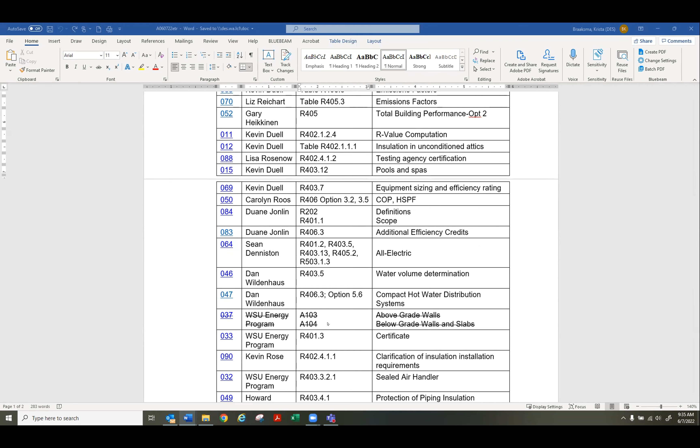Okay. We will now look at the agenda that you see in front of you. And is there anybody who wants to either modify something or make a motion to approve it as written? Just so you know, all the remaining proposals are on the agenda today. I do not expect we will get to every single one of them, but we will get through many of them. And I did inadvertently add a proposal that was dismissed because it was incomplete, and I apologize. I've got it stricken here. So we will not be hearing that one.

Motion to approve. Second that motion. This is Greg. Thanks, Duane and Greg. We have a motion. We have a second. Is there further discussion on the agenda? Okay, all in favor, say aye. Aye. Aye. Aye. Any opposed, say nay. Okay, we now have an agenda. We have minutes from May 27th.

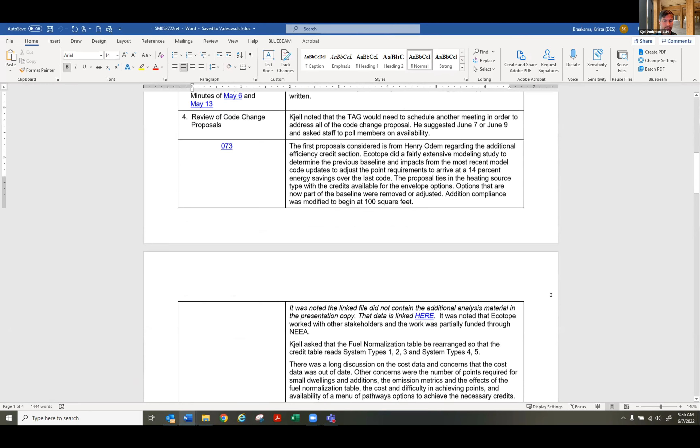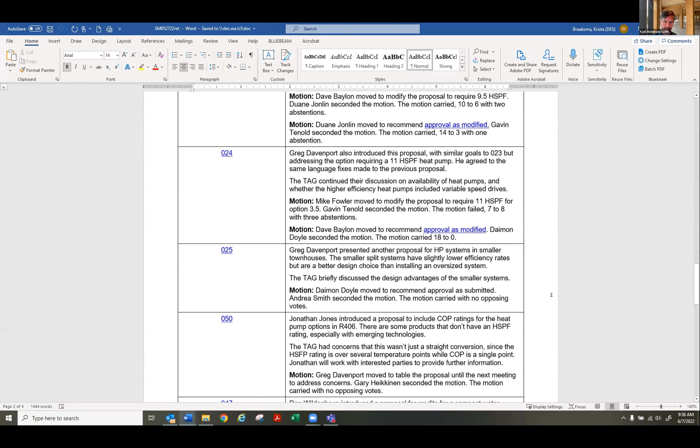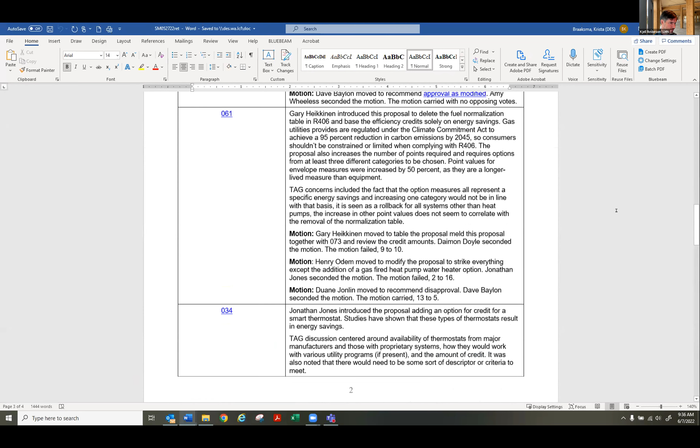This is Amy. I move to approve the minutes of May 27th. Thanks, Amy. Do we have a second? Second. Okay, we have a motion to approve the minutes as written. We have a second. Is there further discussion? Okay, all in favor, say aye. Aye. Aye. Any opposed, say nay. Okay, we have an agenda. We have minutes approved. We are on to the good stuff, the proposals.

We're going to start with 065, Sean Denniston, heat pump space heater. This was tabled a while ago, and we are now going to consider it today. So Sean, you have the floor to talk about any revisions. And then I'll ask for anybody else who helped Sean, or even if they disagreed with him, to weigh in on the revisions, and then I'll open it up to everybody else. So Sean. Thanks. And I was wondering if I could show 3 quick slides to help frame the discussion and maybe pre-answer some of the questions. Sounds good to me. Go ahead and share screen if you can.

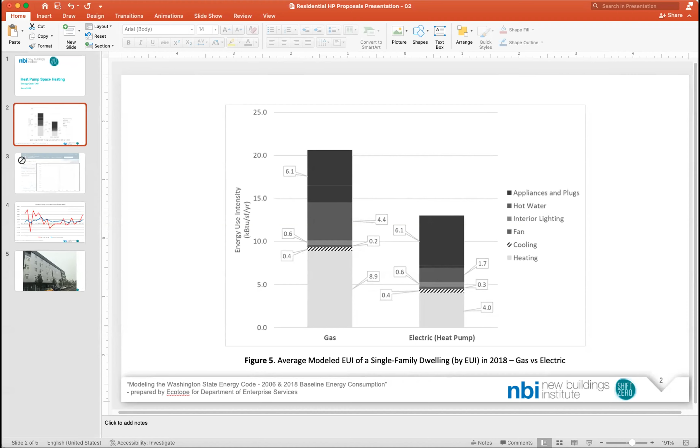All right. Well, there's no reason to put this in presentation mode unless you can't see it very well. So we wanted to establish first the larger framework of why we're even doing this. It really is largely about energy efficiency for us. So this is the average modeled EUI of a single family dwelling from the report on modeling the state energy code from Ecotope.

And what we can see is that the EUI, even on a code compliant gas home, is still substantially higher than the EUI on an electric heat pump home. And so these fundamental efficiency gains are one of the things that are holding the Washington code back. And we want to address that. We really want to lock in those efficiency gains.

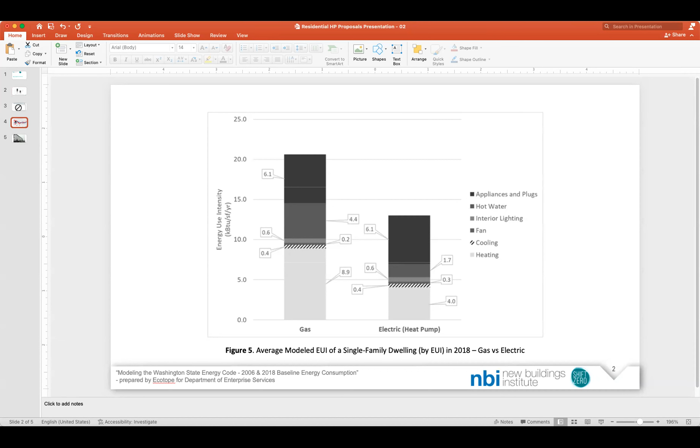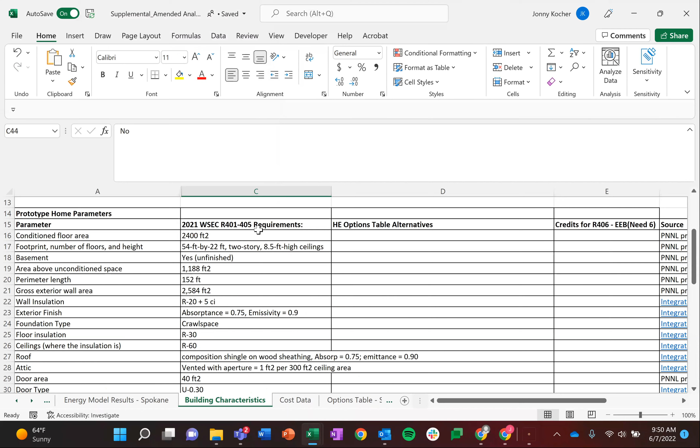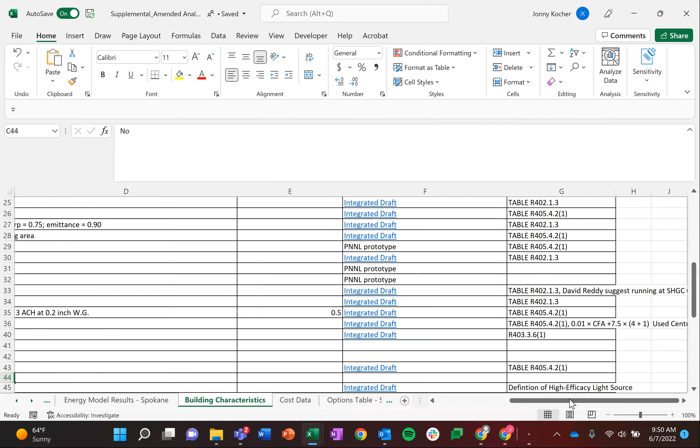Okay, so basically I looked up the current 2021 integrated draft requirements for R401 through 405 and put them in here and listed the exact sources and notes and which table I got. So this is just the building characteristics of the building. And this is what I put into my baseline assumption.

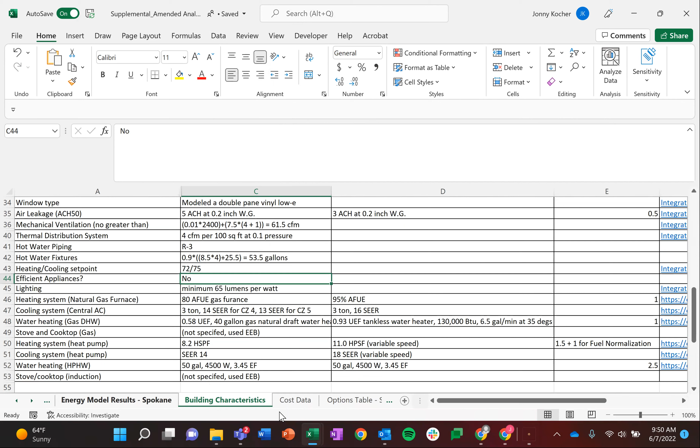And I then had cost data that I had put into a table here. I listed where I got the material data cost, as well as where I got the labor cost, as well as the O&M cost, as well as the equipment lifetime. So I tried to be as transparent as possible on the assumptions.

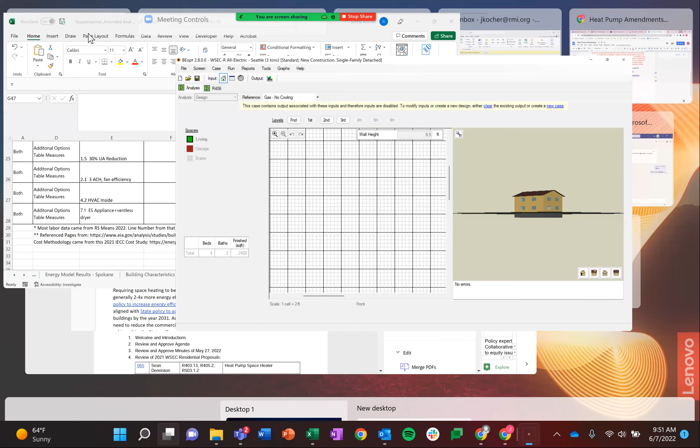I put all of that into a program called BEopt, which I will not run, but I will show you. Basically, it just allows you to put in the different assumptions for the different wall types and for the different equipment types. So here, this is an example of an 80% AFUE, which would be the federal minimum.

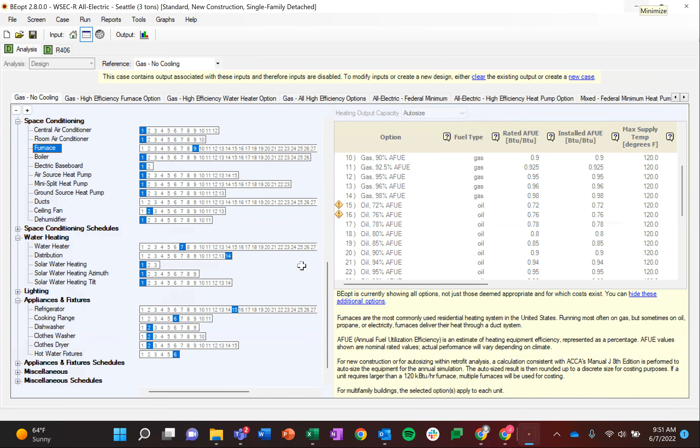Sorry, it's a little loud here. I'm in a location like this, this is as quiet as I could go.

And once I plotted the energy modeling results, this is what came out of BEopt basically for a bunch of different scenarios. I tried to capture every scenario that I was asked a question on. So, what about higher efficiency gas equipment? What about situations where there's no cooling? What about situations where they comply with the R406 table? I tried to capture all of them for both Spokane as well as Seattle.

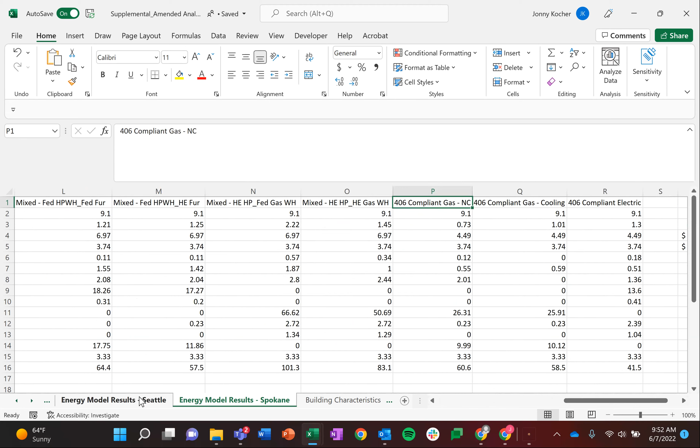And then I created formulas that were referenced into the actual life cycle assessment tool. So this fed all of the assumptions that I used on the lifetime of the equipment, the installed cost, the maintenance cost, as well as the energy consumption and energy use based off of the OFM input requirements. So all of that comes from the main spreadsheet, and it's all looked up through Excel formulas. And all of that fed back to these tables.

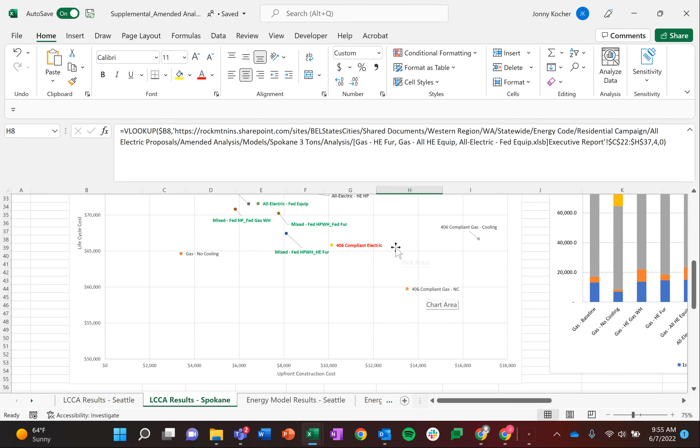And that's for Spokane, and this is the results for Seattle. Similar story. So that's pretty much the gist of it.

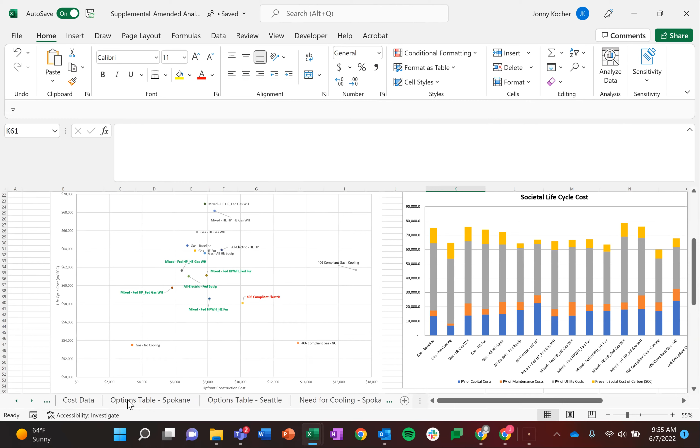Todd chatted that he has a question for you. I'm assuming everybody else probably has some questions as well, but go ahead, Todd. Just real quickly, Johnny, it's interesting analysis. In the life cycle cost tool from OFM, they have a tab for projected future utility costs. Did you use their hardwired numbers or did you update those? I used their hardwired numbers; that's required to be used for these cost proposals. I don't have a choice in that.

You did update the discount rate though to 5%. Is that correct? The discount rate should be what was matched in the input required assumptions in the lifecycle cost tool. There's a separate PDF which tells you what to put in. It does require you to update the OFM variables, which gives you this weird kind of error. But that's what's required. Thank you. Thanks, Todd. Good question. And thanks, John, for the answer. We're going to go back to the order in which people raised their hands.

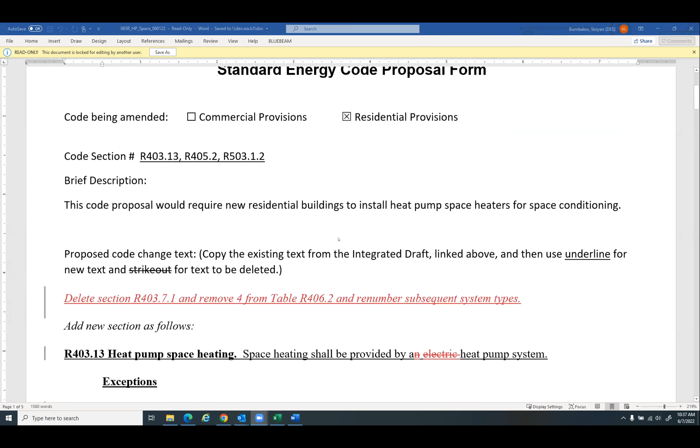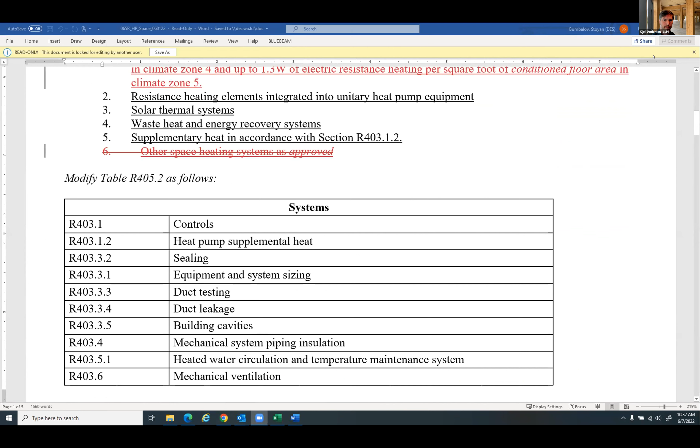So this is 065, and that is not the updated version. Yeah, that's not the updated version. So I think just in the interest of time, until Krista gets a hotspot or gets back here, we should move on to the next proposal. I guess I don't see any other option.

So I'd sure like to finish up where I started with Johnny. I haven't had a chance, and I think it is important. And since I spent most of the weekend looking at Johnny's proposal, like we were supposed to, okay. I appreciate that, and I guess what I was suggesting is we come back to it in half an hour. Would that be okay, Larry? Sure, that's fine. Yeah, I'm not suggesting we vote on it.

I asked Johnny to bring it up, and then I was nice to let other people come in, but I would like to address what Johnny brought up. Okay. Johnny, if you're willing to bring that up again and answer questions, then Larry, go for it. I think we can continue on this one. Okay. I took a lot of time with Johnny's proposal, and I can see that he has spent a lot of time on it. And I want to thank Johnny for that.

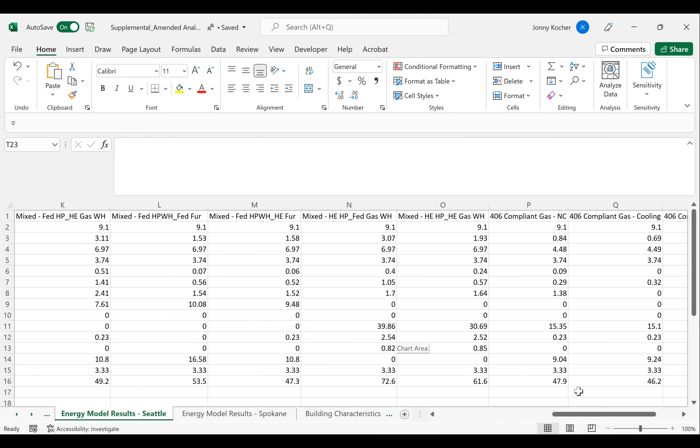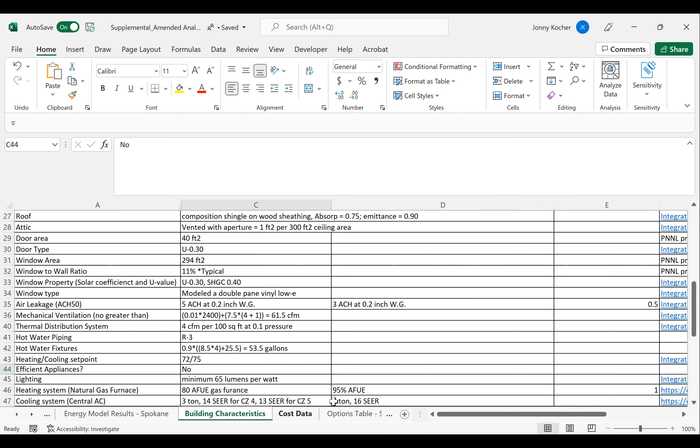But what I see here, and to me, it's more than blunt, is the amount of labor that the man has put in for the piece of equipment. In our normal labor rates here, it's at least equal to the equipment that you're putting in. And if you're going down the labor rates here, you're seeing that the labor is significantly less than what the equipment cost is. And that isn't even in the ballpark.

Okay. And then when you go to look at his lifetime area, I want you to think about this. One of the reasons why I'm so adamant for what we're doing here is the lifetime cost of this stuff and the actual runtime. So when we put a gas furnace in and an air conditioner, the gas furnaces last about 30 years over here, and the air conditioner lasts almost 30 years. Now I want to relate that to actual runtime.

So we may cool out here for 2 months out of the year. So that air conditioner's only running for 2 months, and that's why we get 30 years out of an air conditioner over here. Now you put a heat pump in that system, that heat pump is running 12 months out of the year. And in actuality over here, we're seeing heat pumps last 12 to 15 years. So that means we're going to have at least 3 changes of heat pumps in 50 years, probably 4. And that is not addressed here.

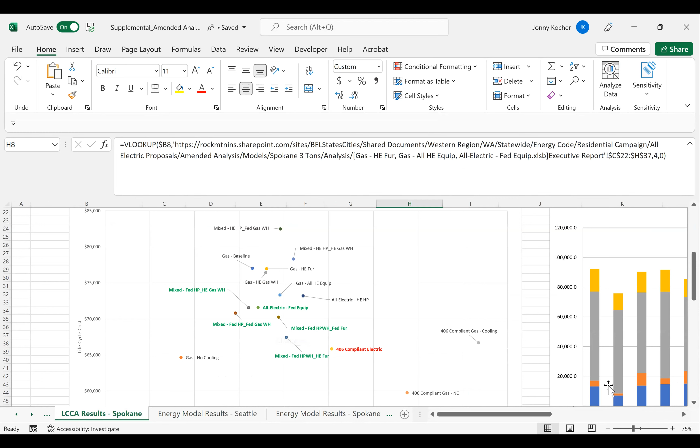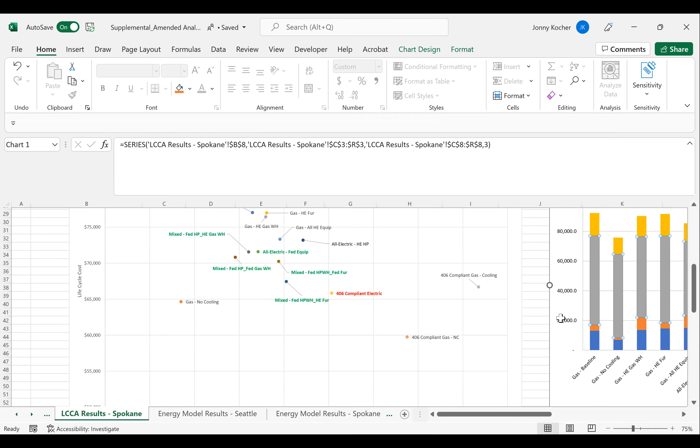And as a consumer and as a contractor, when I look at someone in the face and say, is it going to pay? Because you got to remember that the gas is 2.5 times more BTUs than the electric. Even if you have a 3 COP heat pump, when you start looking at the costs of repair and replacement, I can't honestly tell that customer that it's going to even come close to the gas cost, because the gas cost is going to be significantly less over that 50 years, much less.

Because every time you go back there to work on that unit or replace it, it's at least double the cost of what you put it in for the last time. Okay. I can address some of those, Larry. Sorry, Larry, let me just address some of it.

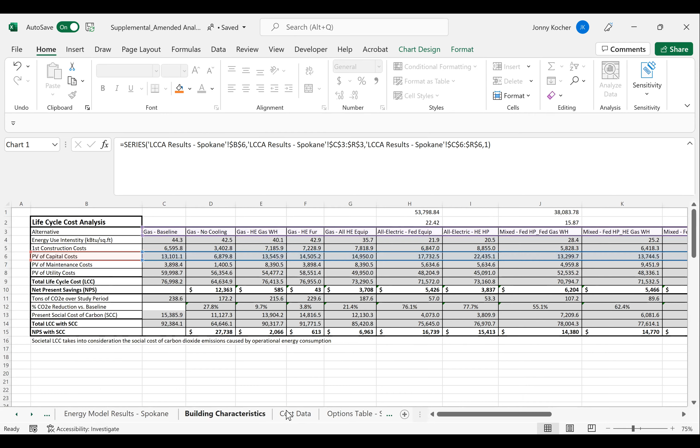So I used life cycle equipment lifetimes based off of data from the EIA that was put out. But those aren't realistic, Johnny. Please let Johnny respond, okay? Yeah, I had to make assumptions, and it says that furnaces last 22 years and heat pumps last 18 years, or air conditioners last 18 years. But I source the data. If you have a different, more objective source, I'm more than happy to rerun the analysis.

But just take a look at it, Johnny. You got to have a piece of equipment that runs 12 months out of the year, and a piece of equipment that only runs 2 months out of the year. Yeah, but an air conditioner only runs 2 months over here at best, because if you look at the hours you showed in your data, the runtime isn't there. Okay. The air source heat pump has a lifetime of 15.5 years. That's probably because it has to run both during the heating and cooling season, versus an air conditioner, which has an 18-year lifetime. And this is based off of the median.

But that isn't even close. If you look at the runtime, the hours ran, Johnny, there is no comparison. And that's why it lasts so long. It's just common sense. If you can't understand that, I mean, Larry, come on.

Come on, Dave. I'm tired of you butting in. But that's true, Larry, these are facts. They're not facts. They're things you're making up out of your head. Point of order. Okay, Dave, you do not have the floor. Larry, you have the floor, but you also need to be respectful of other people. Okay.

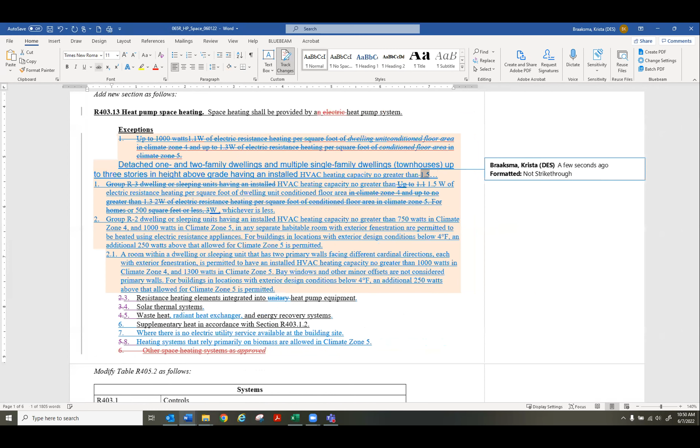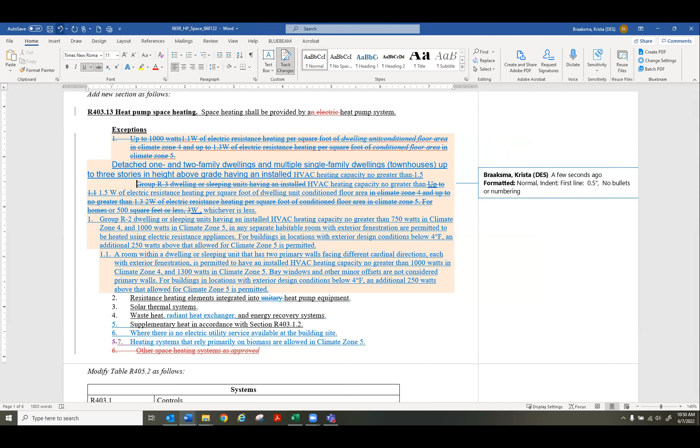Perfect, thank you. Just wanted to say a few thoughts. So as an association, we are opposed to this proposal. Probably not surprising. There's a current heat pump supply issue. It's hard to get now, and with California having their heat pump mandate coming up, it's going to be even harder for us to get these units. Aside from that, we have a shortage of 268,000 housing units, and any additional costs added on to housing, such as this, would then price out more people. So for example, if you add on $1,000 to the cost of a home or apartment unit, about 2,200 people are excluded because they can no longer afford to rent or purchase that unit.

So that means that based on the LCCA that was provided by Johnny, so thank you for doing that, a fully electric home would price out 22,000 people in our state. We have a housing and homeless crisis right now, and it's great that heat pumps allow for cooling, but it's not so great if you can't afford to shelter yourself in the first place. Anything that makes housing more expensive doesn't make it more affordable, and if the TAG and further down the line the SBCC at final adoption passes this proposal, it's going to be a sad day for housing affordability for our state. I would just urge a no vote from TAG members.

We can't see this go through the entire process. This just signals to Washingtonians and our neighbors and our loved ones that lowering greenhouse gas emissions is more important than their right to be sheltered. So I would urge a no vote.

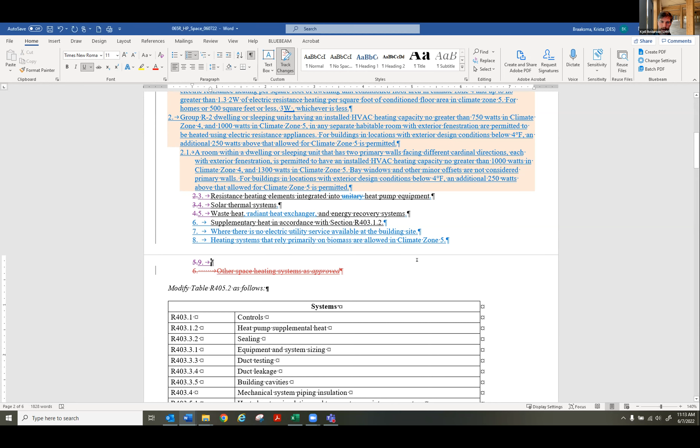Thanks, Chell. I'd like to make a motion to pass this proposal with 1.5 watts per square foot or 500 watts, whichever is greater, under exception 1. Okay, I understand the motion as to pass this proposal as modified, which includes all the additional language on the screen that we have modified today, including the 1.5 watts and the 500 watts option. Correct. Let's vote. Okay, just a second, I just want to make sure that everybody, including myself, is clear on the motion.

So that would be exception 1, and then we would delete that, so the new exception 1 would start with detached one- and two-family dwellings and include the 1.5 watts and the 500 maximum. Okay, that is the motion on the floor. Is there a second? This is Amy. I will second.

This is Luke. I just want to bring attention to, I think Greg said 500 watts, whichever is greater. It's written on the screen as whichever is less. Yes, that's correct, Luke. Whichever is greater. It allows the small homes to have at least 500 watts. Okay, that's the motion as I understand it as well. That's the intent of the motion at least. Okay, thank you. Thank you, Luke. Okay, so hands still up. Andrea?

Sorry, there's a motion in play right now. The motion is to pass this as modified with the 1.5 watts of electric resistance or 500, whichever is greater. That's the motion, and we have a second for that. Okay, I have nothing further to say. Okay. Amy? Oh, sorry, I meant to lower my hand. Okay. Larry?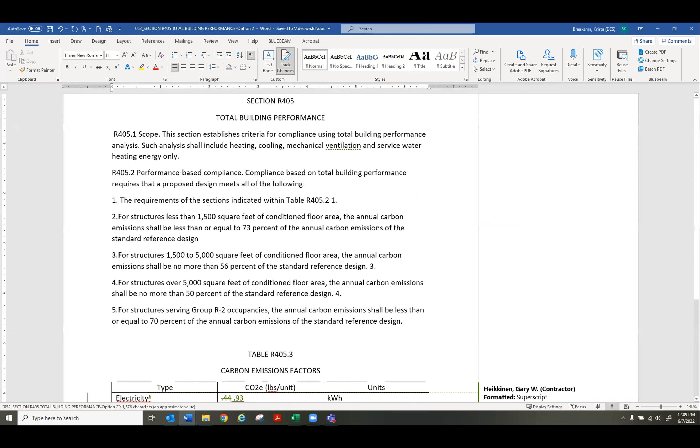We are on to the next one, which is Gary Heikkinen's proposal 052 on total building performance option 2. I believe we tabled this one last time, and we're going to reconsider it. So Gary, you have the floor, and you can obviously wait until the proposal comes up. Thank you. So this really is talking about the same electricity factor, and maybe an answer to Mike Kennedy's question. I have not seen, I guess, an updated report from the Northwest Power Council.

This number, 0.93 pounds per kilowatt hour, is from the Northwest Power and Conservation Council's 2018 report on avoided emissions. It is a projected number based upon their report, and I believe it is for the year 2026. The number for 2029 or 2030 is 0.97, but this is the number for 2026 from the Northwest Power and Conservation Council, proposing that they are a more local, well-respected organization. And I believe this is a better data source to use for these purposes. So that's all I need to say on that one.

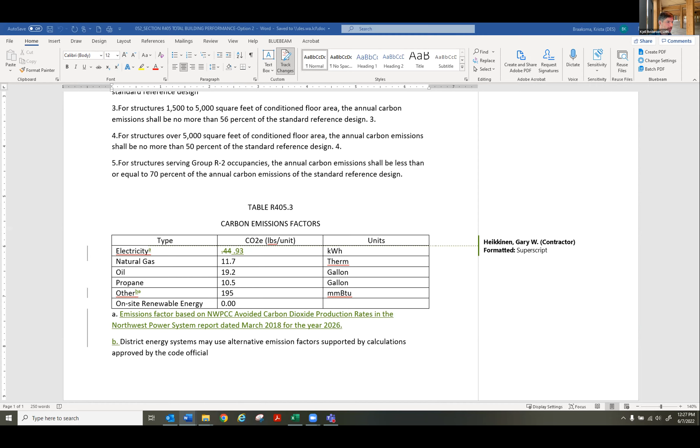We are going to move on. We have about a half hour left in our joyous time here today. We're on to 011. Our proponent is Kevin Duell. Kevin is not here. I guess we could move on from there if we wanted to, but just a second. I think Kevin was on. Kevin, are you on? Sorry, double muted. Yes, I'm back. Oh, Kevin, welcome. You have the floor.